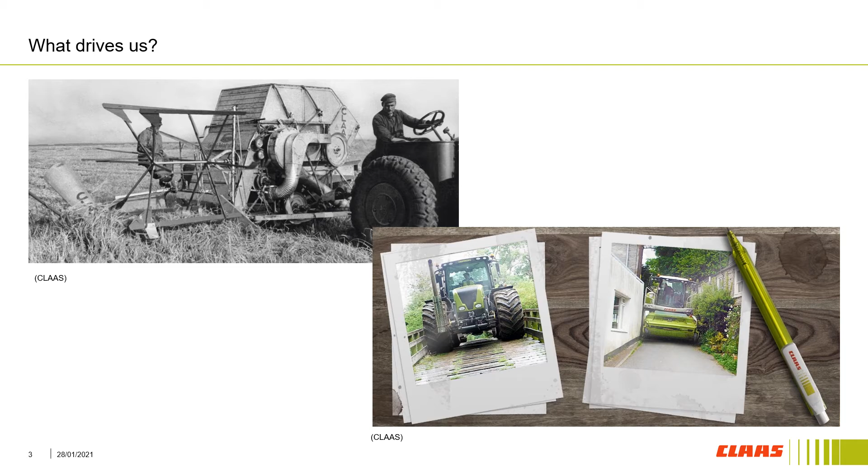Sometimes this ended up that machines had a fifth wheel. It looked ugly. Short machines had to be used to pull cutter bars for combine harvesters, not to exceed the allowed total length of the system. And the picture that can be seen every day, slurry tanks are often operated with significant overweight. Even me, working for a manufacturer of large-sized machines, I'm asking myself about limitations of scalability. Other businesses obviously reached their limits.

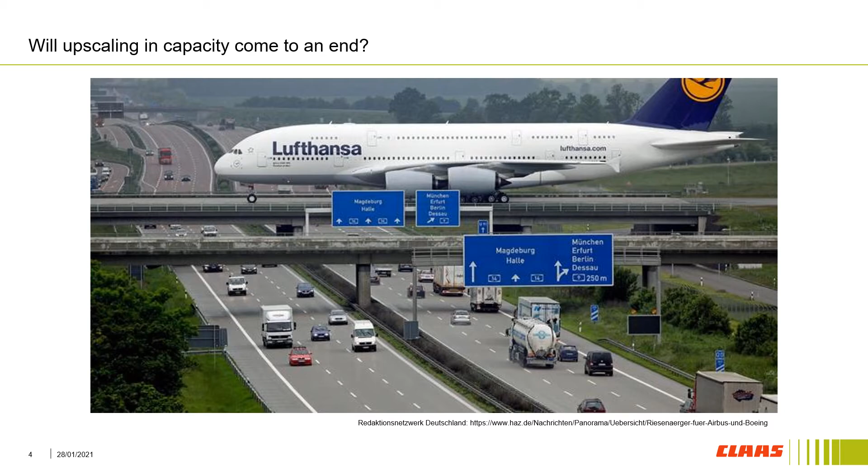It can be asserted that installed machine capacities increase over time. Obviously, only a certain portion of the installed capacity can be realized in daily operation. A process gap results that needs further investigations and may motivate for new approaches. These are, first, think about transformation processes. This is technical related. How can technical processes or technical systems be improved? Second, think about transaction. This is more process related. How can processes in terms of decision support be improved? I have done some research on that. Sources are listed on the last slides. See further readings.

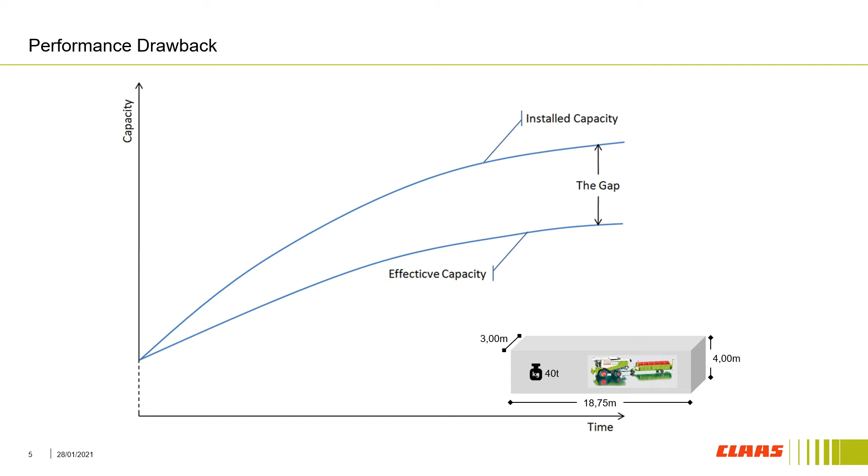The before mentioned gaps are a general issue in production-oriented businesses. Obviously, they differ by domain. Due to high environmental exposure and perishableness of products, the utilization capacity is significantly low in agriculture. An example of high utilization capacity is the semiconductor industry that creates an environment specifically designed to production needs. Forestry has a bigger utilization capacity than agriculture because product properties allow for a decoupled and thus sequential process. Of course, wood is not that perishable as agricultural products. Although arable farming will never come close to the utilization rate of semiconductor industry, it is necessary to work on improvements.

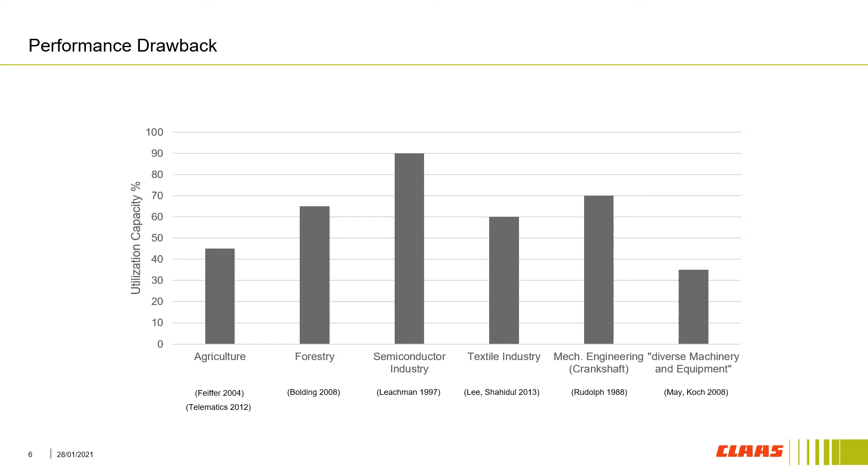When thinking about autonomous systems, numerous aspects shall be taken into account. Some are parts of everyday engineering processes, for example labor efficiency, environmental adjustments, and product reliability. Sustainability, resource efficiency, and AI are drivers for autonomous systems at the other end of the scale. For a manufacturer of harvesting machines, autonomy is challenging because it deals with huge amounts of material to be processed. Processes in arable farming, like tillage and plant protection, appear to be more obvious to make use of autonomy.

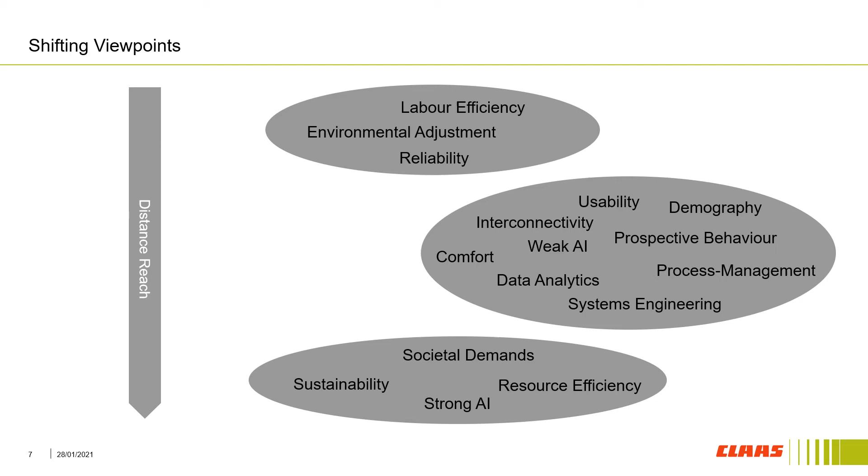Our thinking in terms of high automation was and is driven by rule-based systems. Numerous sensors, controllers, and actuators that already existed were related to each other, representing an advanced expert system. Starting with some basic sub-processes, capabilities were extended over time. This approach is of course not limited to combine harvesters, but other machines and their interaction, including business processes.

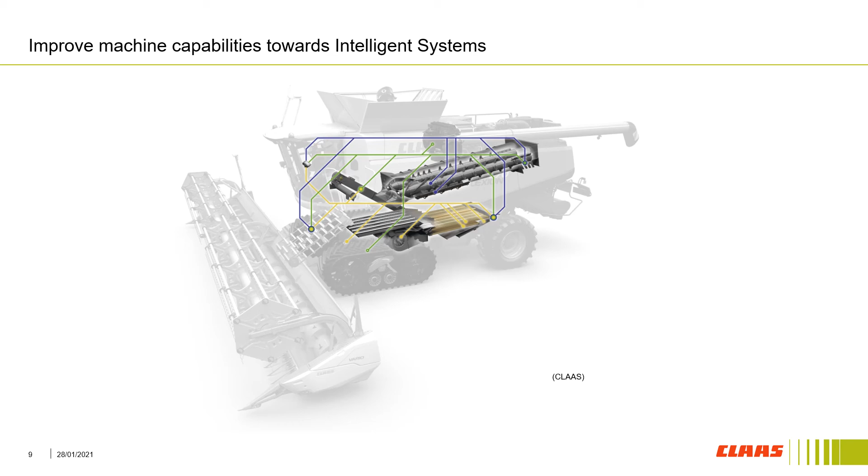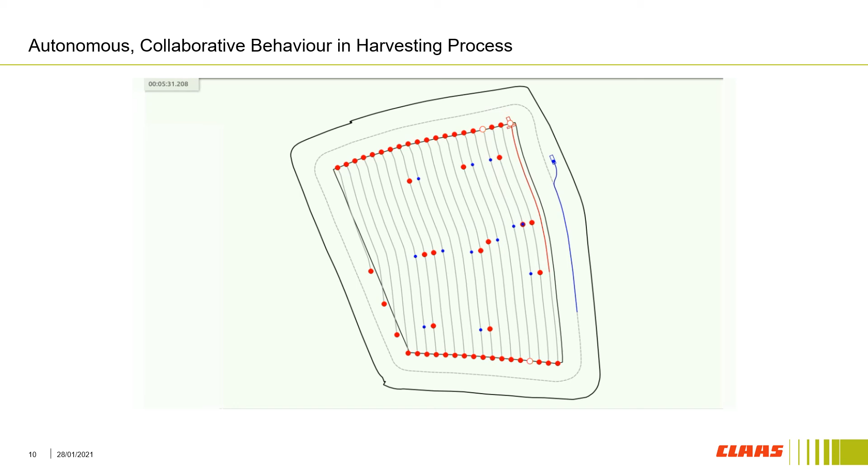This slide shows an animation of combine harvester and grain cart, each working in autonomous mode, trying to optimize collaboration by adjusting local and global action plans. Own behavior is at least in parts determined by the other machine's situation. The problem can also be solved with a grain cart serving two combines, but not shown here. Core problem here was not making machines autonomous in terms of driving, but to execute a productive process and increase utilization capacity. Please play around with this animation. It is based on real-world data. The line ahead of each machine visualizes the local path plan.

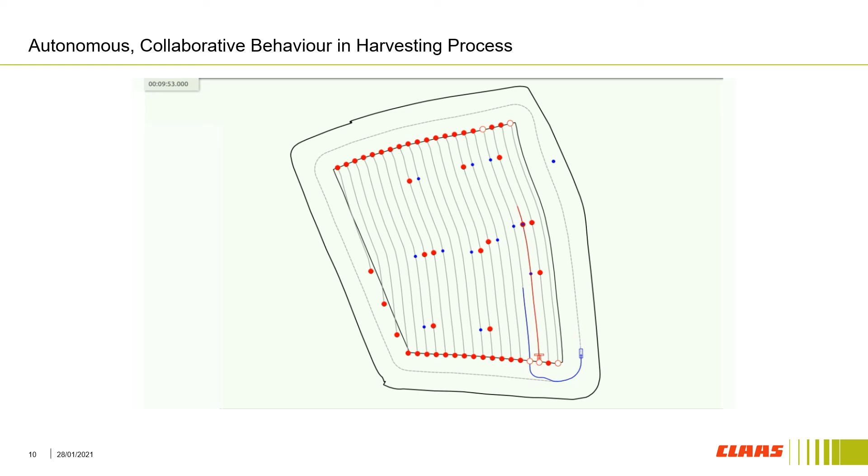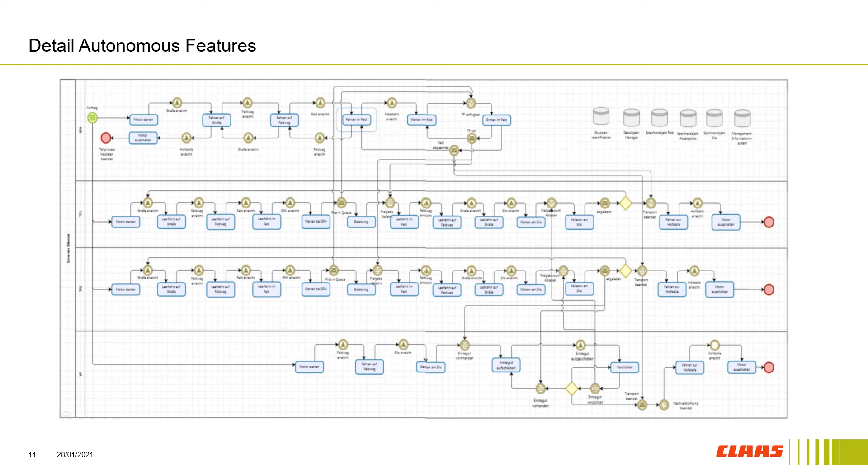It is obvious that there is not one approach to autonomous systems. They either start from scratch or can be considered evolutionary. For us as a manufacturer of harvest machines, the evolution seems appropriate. At least for now, they will not look like robots. By the way, how does a robot look? They might become machines with hidden autonomy. Our own farm management software group made us aware that autonomy has to cover much more than machines. We are aware of an interesting path ahead of us. So far, an estimation from a traditional manufacturer of agricultural machines.